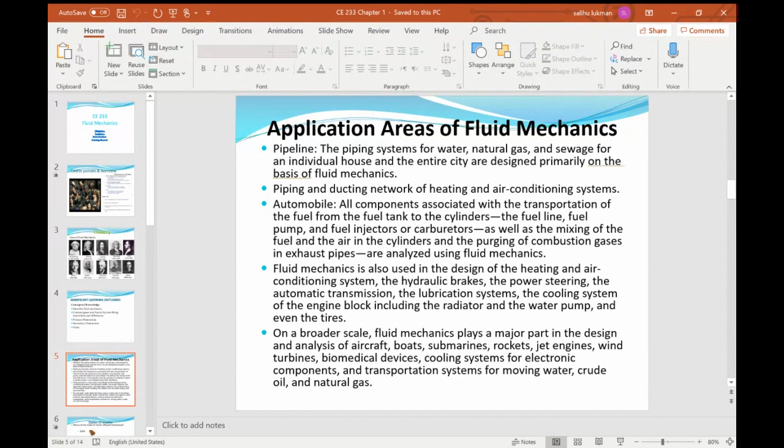Okay, yeah, you can. If you have issue, sign out and sign in. I think you're already back. So let me share my other screen.

Okay, so in chapter 1 here, we will be looking at the properties, the fluid properties. And the significant learning outcomes from this chapter will be, you will learn conceptual knowledge and procedural knowledge. Conceptual knowledge: the properties of fluid, density, specific gravity, viscosity. Most of these fluid properties, you discussed them in Physics 101, okay?

But here, we will introduce the engineering, because the title of the course will actually be Engineering Fluid Mechanics, because fluid mechanics is also studied in physics. But that is from the science perspective. Here we will study fluid mechanics from the engineering perspective.

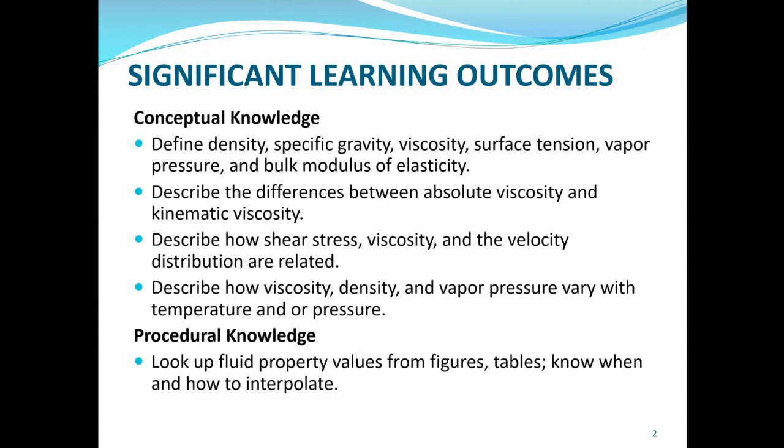And then for the procedural knowledge, we will look up fluid property values in figures and tables, and know when and how to interpolate. Now, before we move on, we would like to start by introducing the system concept: system, state, and property. What do we mean by system? A system is the specific entity that is being studied or analyzed by the engineer. A system can be a collection of matter or a region in space.

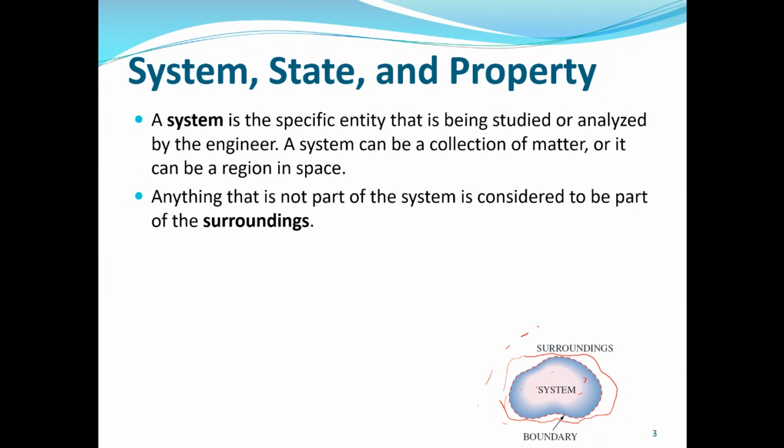We call it a system. It can be a collection of matter or just a region in space that an engineer is interested in analyzing. Like here, this is a system, you can see it here. Now, anything that is not part of the system is considered to be part of the surroundings. You can see the system isolated here. So anything that is not inside the system is called the surroundings.

And the boundary is the imaginary surface that separates the system from its surroundings. It has zero thickness. So this is the boundary, you can see it dotted around them. It's the separation between the surroundings and the system. It has zero thickness, it has zero matter, and it has zero volume as well. So it is just like a demarcation, a separation between the system and the surroundings. We call it boundary.

For each problem you solve, it is your job as the engineer to select and identify the system that you are analyzing. And later in chapter 5, we will expand the system properties to define what is called the open system and closed system: the open system, which is synonymous with control volume, and the closed system, which is synonymous with control mass. And there we'll look at boundaries, constant boundaries, movable boundaries.

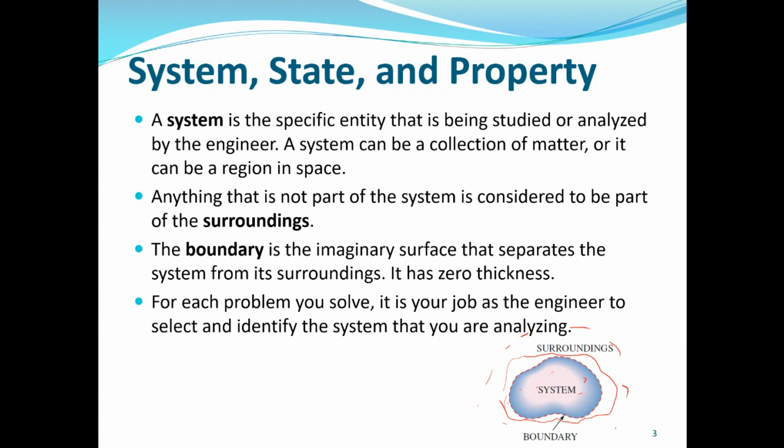Because in a control volume, energy and matter can both cross the boundary, while for a closed system, only energy can cross. Matter cannot cross the system boundary. But we will expatiate more on this in chapter 5.

So systems are described by specifying numbers that characterize the system. The numbers are called properties. Properties here is like when you take yourself, what are your properties? What are your characteristics? You are tall, you are 70 kilograms, your weight. Your height is, let's say, 1.5 meters, and you are light in complexion. So all these are your characteristics, which are also called your properties. So if you look at yourself as the system, those characteristics of yourself are your properties.

So a property in this case is a measurable characteristic of a system that depends only on the present conditions within the system. Like now, if you look at yourself as the system, when we measure your weight, you are 70 kilograms now. Who knows? Tomorrow you can increase if you eat more. If you eat less, your weight can reduce.

And the state of a system means the condition of the system as defined by specifying its properties. It's like when you have a gas in a cylinder, you specify its temperature and pressure. So these are the properties of the system, and the system here is the gas inside the cylinder. When a system changes from one state to another state, this is called a process.

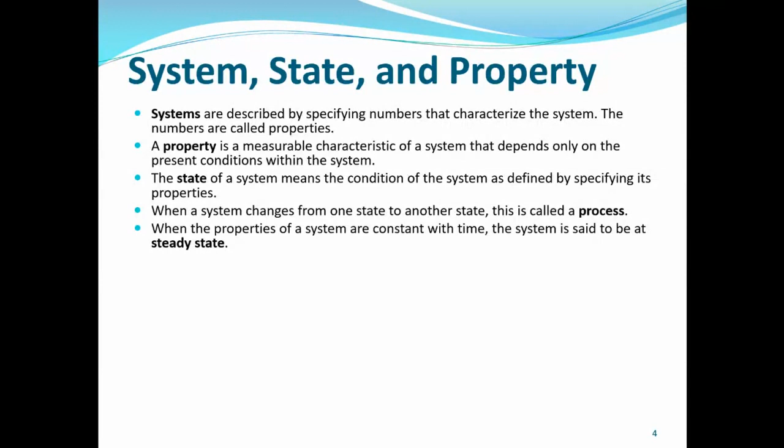When the properties of a system are constant with time, the system is said to be at steady state. When you are considering a given point, when the properties of the system are constant with time, you can say the system is at steady state. Steady means constant; it is not changing. If you are considering a volume of a gas in a cylinder, if the temperature and pressure remain the same at a given point in time, then it is at a steady state.

Whereas if it changes with time, if it is variable at a given point, then it is unsteady. This will expatiate more again when we come to explaining the different types of flow. This is referring to state, but we can also describe it using flow: steady state flow, uniform flow, and what have you.

Properties are often classified into categories. Two examples of the categories are given. Kinematic properties: these are properties of the system that characterize the motion of your system. That's why it's called kinematic. You have the kinetic energy. Whenever you have kinematic, it's referring to motion. Examples: position, velocity, acceleration. So all these are kinematic properties.

And you have material properties. These properties characterize the nature of the materials in your system, like what is their weight, what is their density, their specific gravity. So this is specific to the material. While the kinematic properties are specific because the material gets those properties by virtue of being in motion. You can only have velocity if you are in motion. You can only accelerate if you are in motion, isn't it?

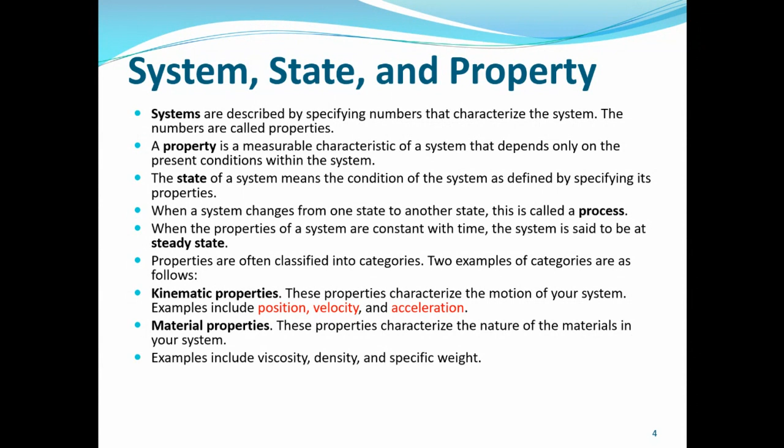Now, system state and properties. I started introducing the closed system, which we call control mass, with a moving boundary. You have a gas here whose mass is 2 kg and which occupies a volume of 1 meter cube. So if you consider the gas to be the system, the boundary between the gas and the container is the moving boundary, because this is the piston preventing the gas from escaping. And this is a fixed boundary.

When you apply heat here, the temperature changes, it expands, and it may push the piston up depending on whether it is movable or not. So if it expands, the volume now increases, it changes from 1 meter cube to 1.5 meter cube, but the mass remains the same.

You have the same mass of gas inside. Okay, the mass remains the same. So that's why it's called closed system or control mass. Okay, the mass doesn't change. But for control volume, usually you have inflow and outflow. Okay, inflow and outflow of mass, as well as energy. So here only energy can pass through, but mass doesn't pass through.

Okay. Now the property of the system, you can characterize the property of the system here, like you can provide the temperature, the volume, the pressure. Okay, so all these are properties of the system. Or in this case here we have mass, and as well as the volume, although the volume changes in the second one. Okay, is it clear? Gentlemen, is it clear?

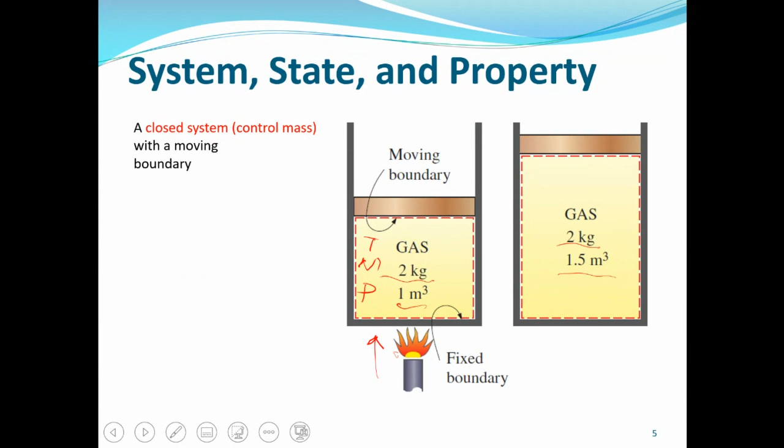Okay. Now, we will look at the general properties of fluid. We have started explaining about velocity as the rate of movement of fluid. It is considered very significant when studying kinematics and hydrodynamics of fluids. It has no significance when dealing with fluids in hydrostatic conditions. Hydrostatic conditions mean the fluid is at rest, so we don't consider velocity. We can say the velocity is zero. So it's a special case. And the SI unit of velocity is meter per second, while the imperial unit is feet per second.

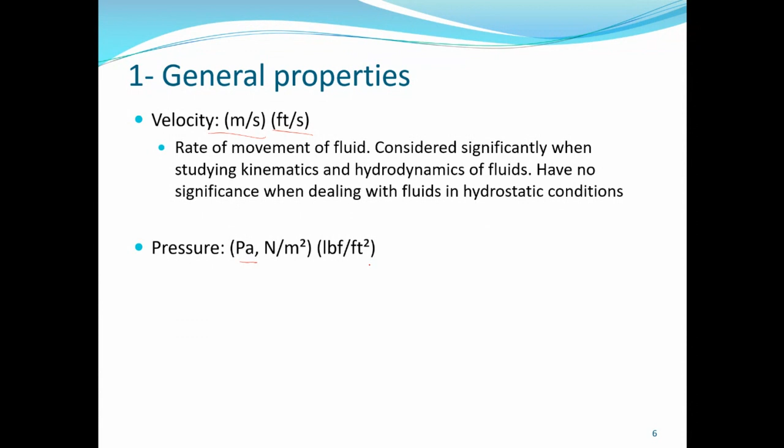And then pressure. The SI unit is Pascal, which is a special unit given to it using the name of the scientist who worked very well in that area, Blaise Pascal. And then the derived unit is Newton per meter square. Because pressure is usually very high, we usually use higher values, kilopascal, megapascal. Practically, the atmospheric pressure, as small as it is, is 101.3 kilopascal. So usually we use prefixes to show the multiple, like kilopascal, megapascal, and what have you. And then you have the imperial unit pound force per feet squared.

And pressure, we have started explaining pressure as it applies to fluid and solid, although we will also expatiate more on that. Because pressure, when you're talking about fluid, is different from when you're talking about solid. In solid, we usually call it the normal stress. In fluid, we call it pressure, for water and gas as well. For gas, we usually consider it to be constant. For liquid, it varies with depth. It varies with depth also in case of gas, depending on the elevation, the altitude, the variation in depth. If it is not significant, we assume it is constant, unless the depth is really huge.

So pressure is the compression or stress at a point in a static fluid. Next to velocity, the pressure P is the most dynamic variable in fluid mechanics. Differences or gradients in pressure often drive a fluid flow. When you have differences in pressure, that is when you have fluid flow. Fluid flows from areas of higher pressure to areas of lower pressure, from high pressure point to low pressure point.

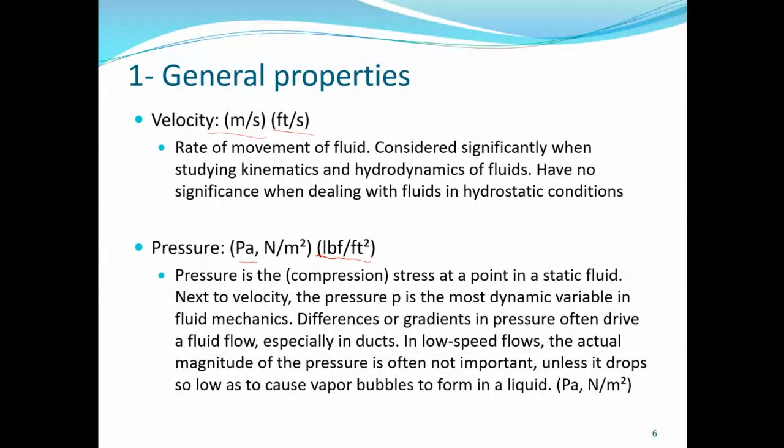And in low speed flows, the actual magnitude of the pressure is often not important unless it drops so low as to cause vapor bubbles to form in a liquid. When you have a drop in pressure below the saturated vapor pressure, when you have flow in a pipeline, you have what is called cavitation. So when it drops below the vapor pressure, you have bubbles forming in liquid, and those bubbles can be disastrous in pipe flow. This we'll explain under cavitation.

Now, in addition to pressure, you have temperature, which is a measure of the internal energy level of a system, of a fluid, the total internal energy of fluid. Although engineers often use Celsius or Fahrenheit scales for convenience, many applications require Kelvin or Rankine. The Kelvin is the SI unit of temperature without degree. Initially, we used degree Kelvin, but around the 60s it was removed. So for Kelvin, we don't use degree, but we use degree Celsius, degree Fahrenheit, degree Rankine.

And this is the formula to switch between them. Rankine is this for Fahrenheit, this is for Kelvin, and you also have another formula when you want to convert from Celsius to Fahrenheit. So more often than not, you have this to be the formula: degree Celsius is degree Fahrenheit minus 32, times 5/9. And you can make degree Fahrenheit the subject of the formula, and it is going to be degree Celsius times 9/5, plus 32.

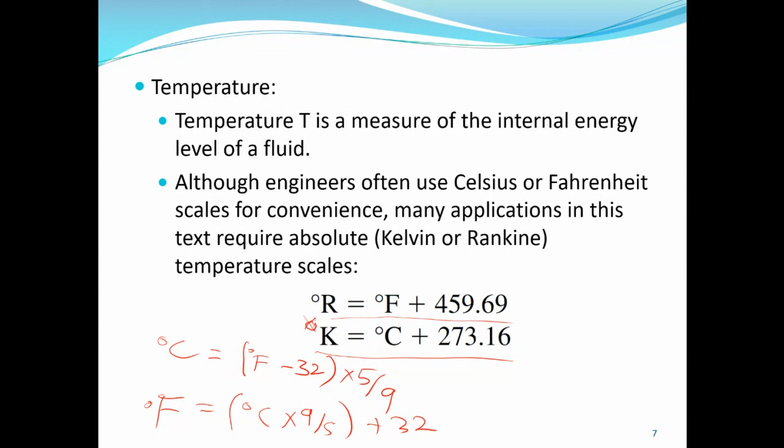Now, mass density. Like I said, you know what mass density is, definitely. So who can tell me? Just tell me, what is mass density? You can talk if you so wish. Yes, what is mass density? Tell me.

Yes, yes, I can hear you. What is density, gentlemen? Oh, let me check. Can you still hear me?

Yeah, what is density? It is mass over volume, right? Yeah, mass over volume. Mass of system over volume. Good. All right. So let me go back because it was in presentation mode, so I cannot see what you wrote. I have to exit the presentation mode and come back to the application.

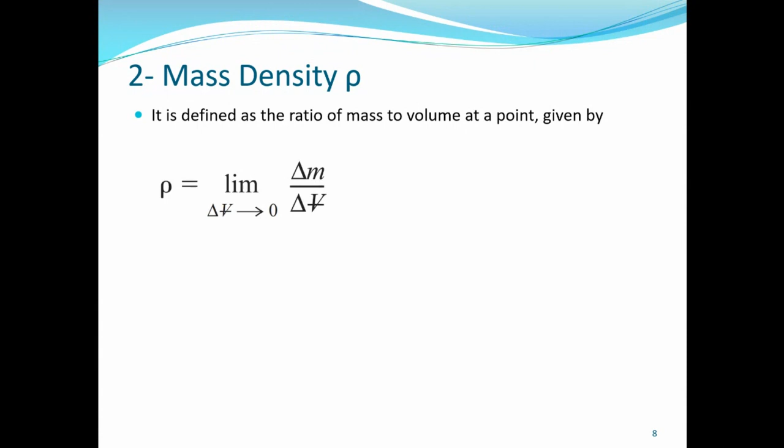All right. So mass density, which is rho, is defined as the ratio of mass to volume at a point, and it is given by the limit notation. Density is when you consider a very small amount of mass, delta M, over a very small amount of volume, in the limit when delta V tends to 0. That is the instantaneous, or simply mass over volume.

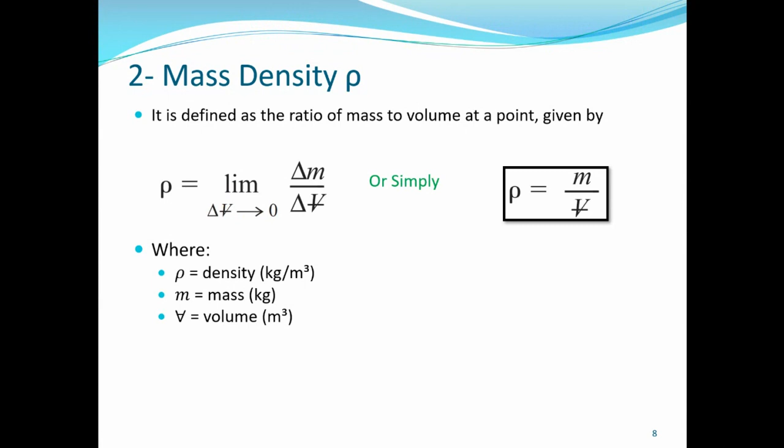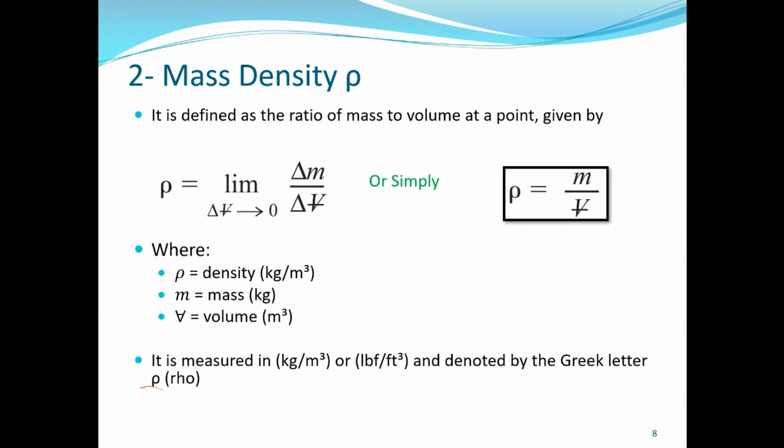So this is like a special case in which you have the average, when you have the whole body, the average mass over the average volume, where density is in kilogram per meter cube, mass is in kilogram, the SI unit, and volume is in meter cube. It can also be measured in imperial units, and we use rho to represent mass density.

The density of water at 4 degrees Celsius, where water has its highest density, is 1,000 kilogram per meter cube, and it decreases slightly with the increase of temperature. This is table A5, which shows the variation of the density of water. As you can see, when the temperature increases, the density decreases.

So why does the density decrease with temperature? Why does it decrease with temperature? Who can explain to me? Who can explain to me? Yes, I can hear you, please.

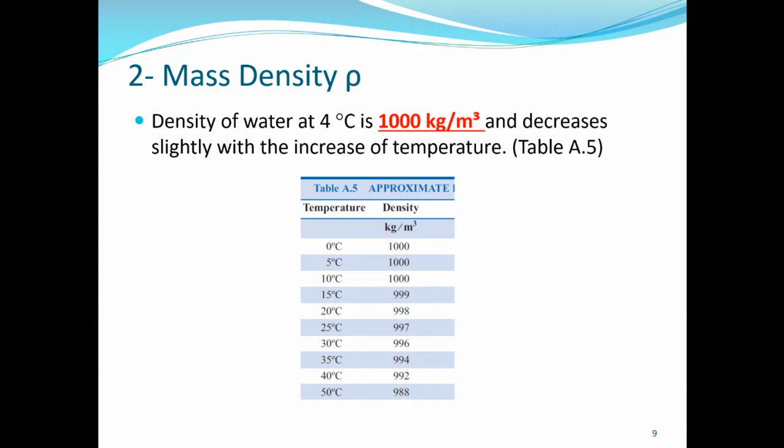You can see at 50 degrees it is 988, at 4 degrees 1000, at 0 degrees also about 1000. But usually when it turns to solid, that is to ice, the density is lower than that of water, and that is why you have ice floating in water. Okay, we'll come back to this.

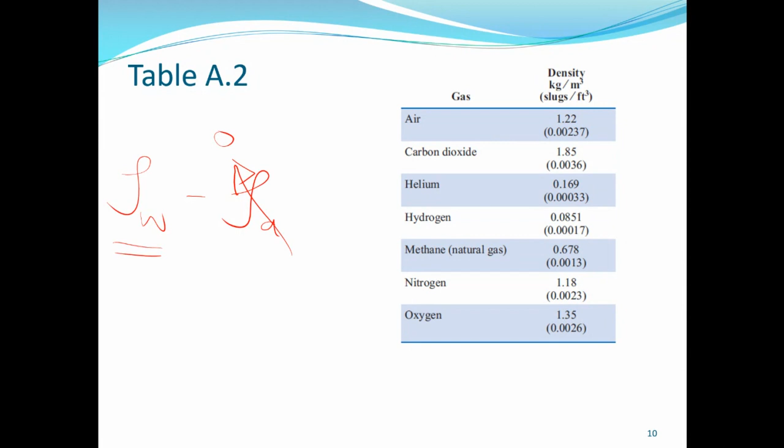And that is why in computation, when we have, let's say, density of water minus density of air, we normally ignore the density of air or set it to 0 because it is very small compared to the density of water. You can imagine here 1000 minus 1.22. Very negligible change, 998 point something. So it is usually very, very small.

So for practical purposes in computation, as we are going to see in chapter 3, when we have gases in our system and we want to find the pressure using hydrostatics, we normally ignore the density of the gas because it is so small, if we are taking a difference between density of liquid and density of gas. Air is 1.22, very small.

Carbon dioxide, 1.85. Helium, 0.169. Hydrogen, 0.08, very, very light. Methane, natural gas, 0.6. Nitrogen, 1.18. Oxygen, 1.35. Some of these gases are available in the atmosphere, isn't it? Who can tell me what gases are available in the atmosphere?

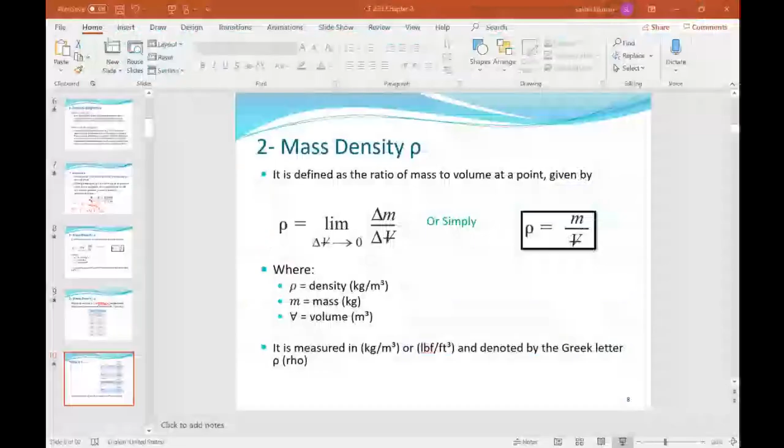I need to be switching to see what you are saying. Oh, someone is saying, what is the question? Because the molecules are small. So, well, tell me the gases available in the atmosphere quickly. You can just tell me or you can type it. I am back to the Blackboard area.

Okay. The gases, all the gases available in the atmosphere. We define the atmosphere as the air surrounding us, the available space around us. Okay, what are the gases in the atmosphere? Yes, you have. Just tell me. Like I said, I enabled your mic. Gentlemen. Ya Shabab.

Okay. Someone is saying hydrogen. But okay. What else? Oxygen, nitrogen. What else? Carbon. Repeat the question. The question is, tell me the gases available in the atmosphere. What are they? Hydrogen, oxygen, and carbon. And what? Carbon? Carbon is not a gas. Carbon is not a gas. Helium, okay, carbon dioxide, okay, now you are talking.

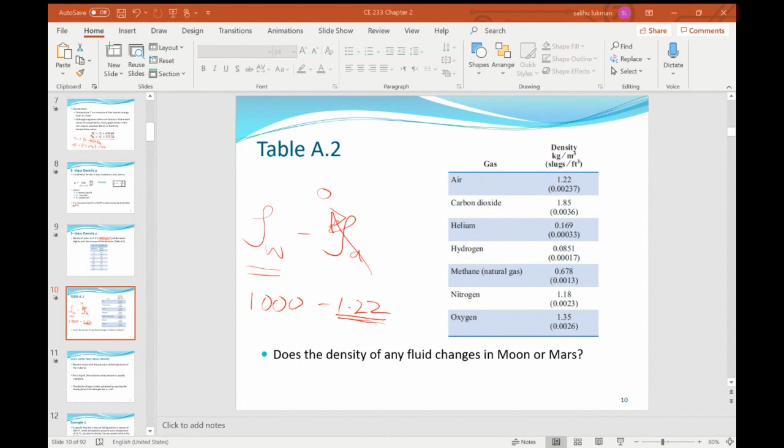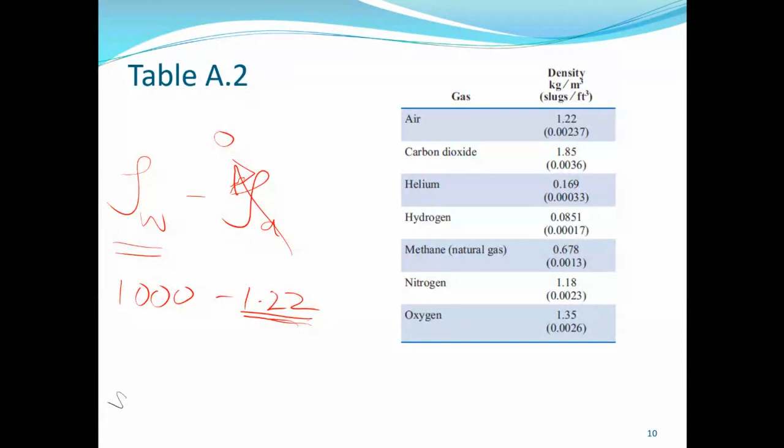Does the density of any fluid change in Moon or Mars? Now, answer this question. Does the density of any fluid change in Moon or Mars? Hmm? Does the density change in Moon or Mars? It is not sharing my screen again. It does not change. Why? Okay. Does the density of any fluid change in Moon or Mars?

It doesn't change because density is mass over volume. And does mass change in Moon or Mars? No, mass doesn't change. Weight changes? Yes, weight changes from planet to planet because of the variation in acceleration due to gravity. But the density of any fluid doesn't change irrespective of where it is.

Some useful facts about density. Density varies with the pressure and temperature of the material. We have seen for water how it varies. For liquid, the variation with pressure is usually negligible, because density is mass over volume.

Liquid has tiny spaces between the molecules, but before you can compress it, before you can reduce the volume of liquid, the pressure has to be so huge. That's why we consider liquids to be incompressible, because you need to apply about 210 atmospheres to compress water by 1%. Just 1%. You need 210 atmospheres.

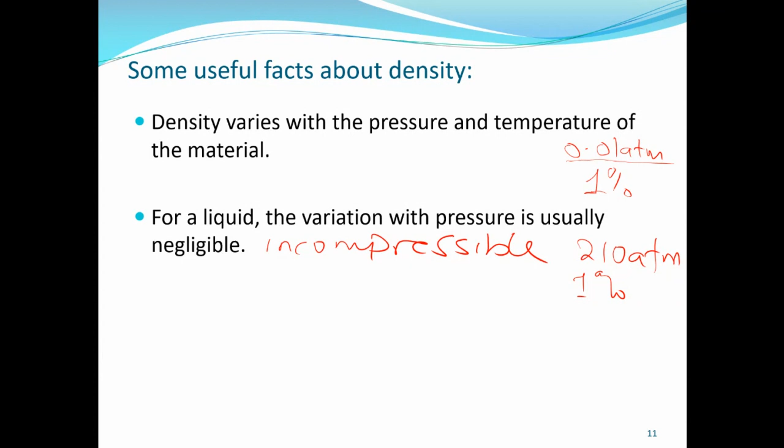The density of a gas is often calculated by applying the density form of the ideal gas law. Although fluid, like I said, also refers to gases, I will not be delving so much into the ideal gas equation or the gas properties, the gas treatment.

Our focus will remain on water as our main fluid. But like I explained, mechanical, civil and chemical engineers deal with a lot of systems that have both liquid and gas, or even just gas alone. So they need to go all the way to deal with the ideal gas equation, the properties of gases, and what have you. But for civil engineering applications, more often than not, our main interest is water as our main fluid.

Now, we said density varies with pressure and temperature. Why does it vary with pressure and temperature? Density is mass over volume. This we explained. So what happens when you increase the temperature? When you increase the temperature, the molecules become more mobile, isn't it?

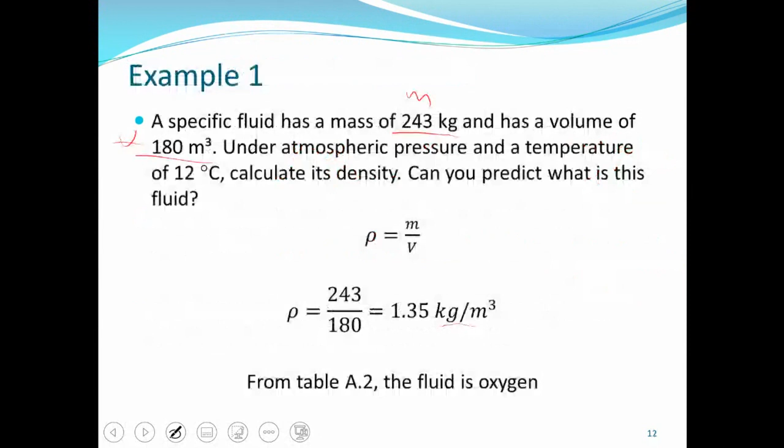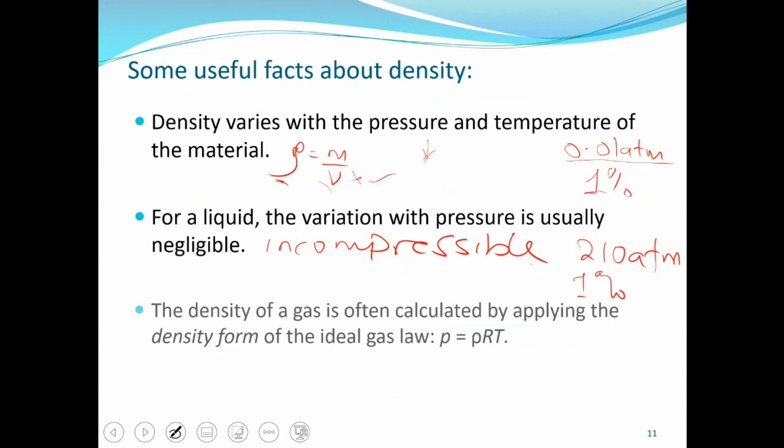We can go back to table A.2. If the density is 1.35, that is oxygen. Oxygen is the one having a density of 1.35. So, a very simple application: the fluid is oxygen. Now we'll move on to another property, which is specific weight.

Specific weight is the gravitational force per unit volume of fluid, or simply weight per unit volume. Weight is the gravitational force acting on a body, the effect of the force of gravity on that body. So weight per unit volume is the specific weight.

In fact, when you hear the term specific, it means it is per something. Either you're considering mass, 1 kilogram, as in specific heat capacity, or in this case specific weight, specific volume, and what have you. It means divided by something. Here we have per unit volume, and we use the Greek symbol gamma for specific weight. So gamma is just weight over volume.

Weight is what? Weight is mass times gravity, over volume. And then what is mass over volume? We just finished explaining it: mass per unit volume. Tell me, what is mass per unit volume? Density. So this is now rho g, isn't it? So specific weight is either weight per volume or equal to rho g.

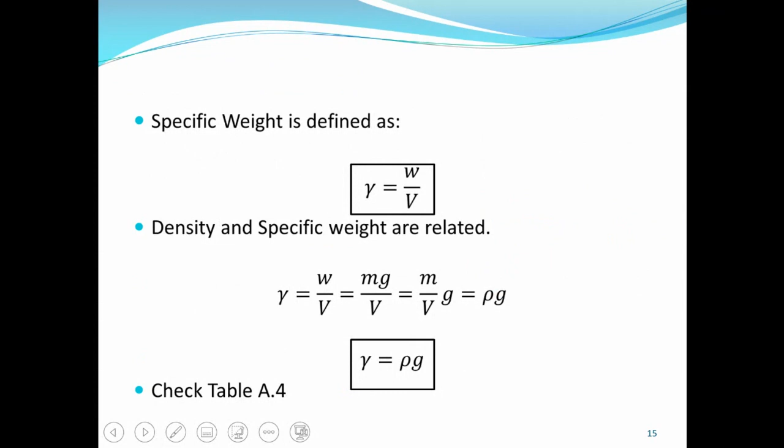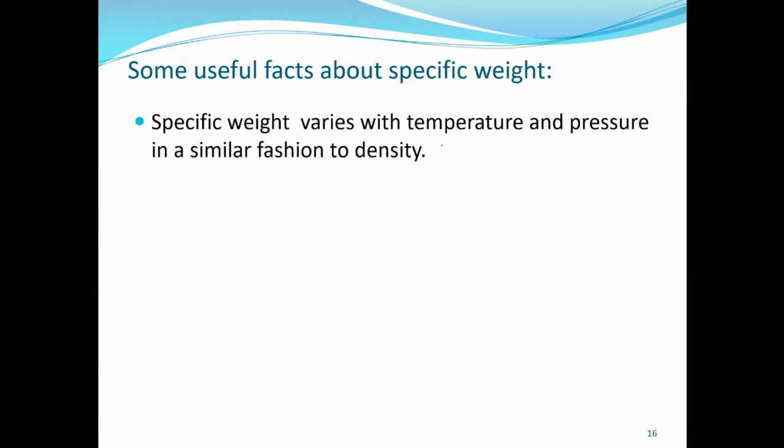Now specific weight, weight over volume, some useful facts about specific weight. Specific weight varies with temperature and pressure in similar fashion to density. Since specific weight depends on density, whatever will affect density will affect specific weight. So we'll expect the specific weight to decrease when the temperature increases, and we'll expect it to increase when the pressure increases.

Specific weight is commonly used for liquids, but not commonly used for gases. So why is that? Because the gases, they don't feel the gravity. The gravity doesn't make anything to gases. What? I mean, the gravity doesn't change the gases, so the weight is not commonly used for the gases. What doesn't change for gases? I mean the mass, because there is no acceleration of gravity on the gas. Oh, okay. Can someone expatiate more on that?

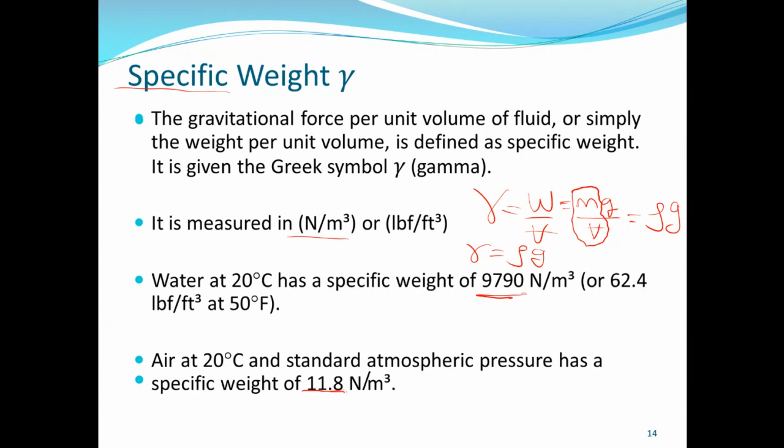You know, specific weight, because we say density. Density of gases is usually very small. You can see here, this is just 11.8, this is 9,790. So it is usually very, very small. The specific weight is not significant for most gases. That's why it's usually considered for liquids.

Definitely the one with higher gravitational acceleration is heavier, from Newton's law of gravity: F equals G m1 m2 over r squared. Let's say m1 is the mass of the planet. So if it is heavier, it will have more gravity; the force of gravity will be higher on the objects around it. Meaning Earth is heavier than Mars, heavier than Moon. But what about Jupiter? The acceleration due to gravity will be far greater than 9.8, because it is heavier than Earth.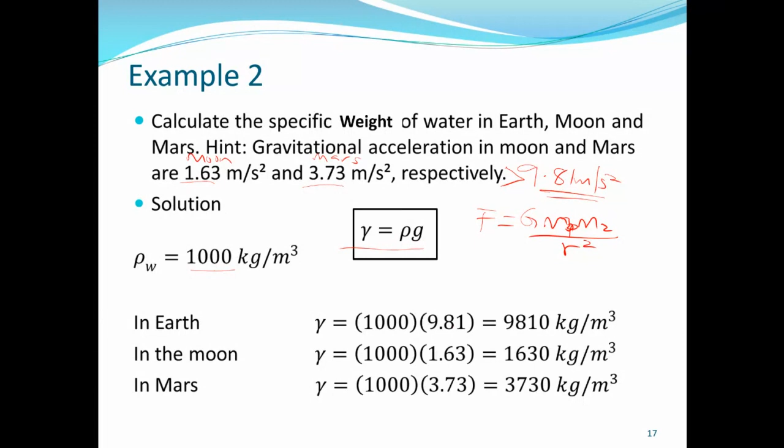All right. So here we want to find the specific weight of water on Earth, Moon, and Mars, and we just use this formula. We know the density of water, which is constant. It remains the same on the Moon, on Mars. But g will change: 9.81, 1.63, and 3.73. So the specific weight will vary, because it's also a function of acceleration due to gravity.

Now, specific gravity or relative density. Like I said, when you have specific, it means it is per something, so you have a ratio. The ratio of specific weight of a fluid to the specific weight of water is called specific gravity. We use S or sometimes SG to represent the specific gravity. Relative density is synonymous; for relative density, we use RD.

Relative density is just the ratio of the density of fluid over density of water. So we are comparing the density to water; our reference in this case is water. Or it's the same thing as the specific weight of any fluid over specific weight of water. So who can tell me what will be the specific gravity for water? Just talk, because I need to exit the presentation to see what you write. What is the specific gravity of water?

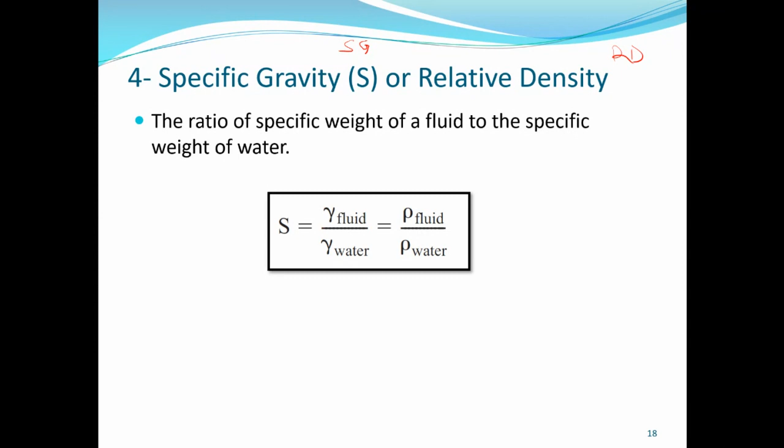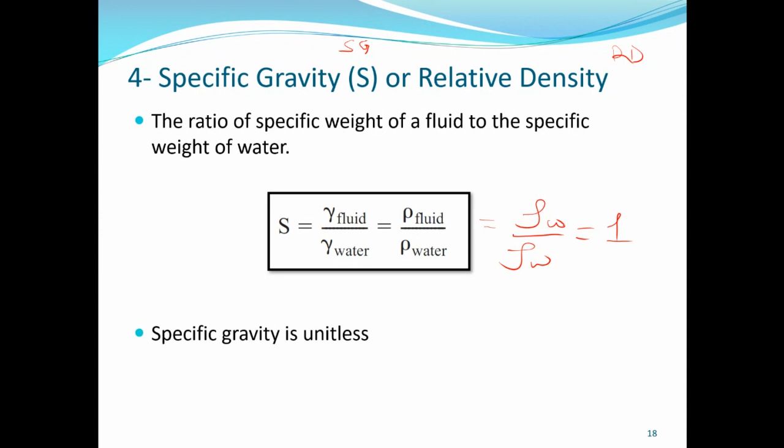Yeah, definitely it's going to be 1, because it's density of water over density of water, so they will cancel out, 1000 over 1000. So the specific gravity of water is going to be 1. Specific gravity is unitless because it's a ratio of the same quantity: kilogram per meter cubed over kilogram per meter cubed. So they will cancel out. It is dimensionless, it is unitless.

Some useful facts about specific gravity. It is equal to 1 if it is water, but what if it is less than 1? It means the fluid density is less than the density of water, so it will float, like oil or gasoline, like benzene. Benzene is less dense than water, but crude oil is heavier than water. So the specific gravity of crude oil is going to be more than 1, so it's going to sink, isn't it?

Wood and styrofoam float on water. Just like we explained the density of air: density of air is 1.2, but density of hydrogen is less than the density of air. That's why when you fill a balloon with hydrogen or helium gas, it will float. That's why you have hydrogen balloons. When something's density is less than the density of water, it will float in water. The same thing with air.

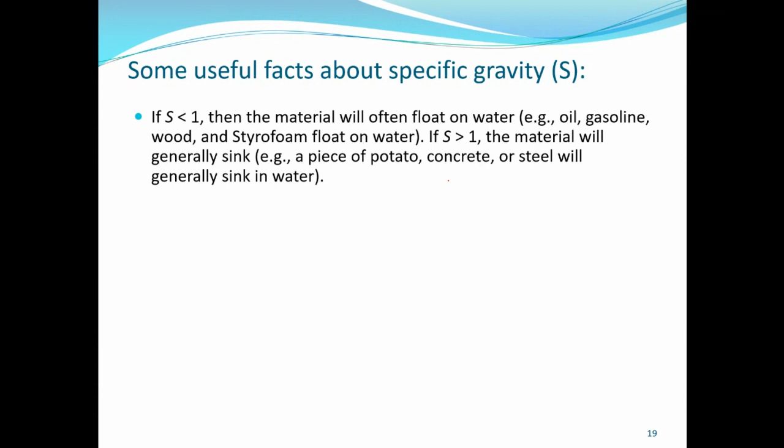When you go to the malls, you have small balloons for the kids filled with helium. When you release the balloon, it rises up, meaning it floats in air, because the density of the gas inside the balloon is less than the density of air. The same thing here: specific gravity is the density of fluid over density of water. If it is less than 1, the density is less than that of water, and it will float.

If it is greater than 1, it means the density of the material is greater than the density of water, and it will sink, like potato or concrete. Most solids have density greater than the density of water. But I told you ice has density less than the density of water, and that's why it floats.

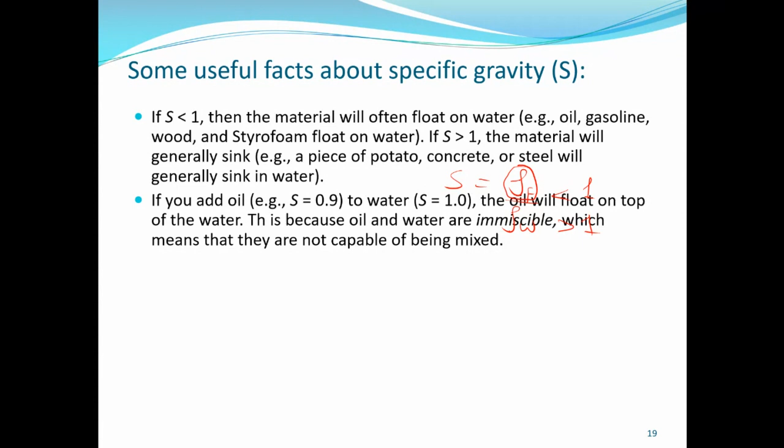If you add oil, whose specific gravity is 0.9, to water, specific gravity 1, the oil will float on top of the water, isn't it? This is because oil and water are immiscible, meaning they cannot mix, they are not capable of being mixed.

If you add alcohol, with specific gravity 0.8, to water, the alcohol and water will mix, so it will not float like oil. Fluids that are capable of mixing are called miscible. The properties of density, specific gravity, and specific weight are related. If you know one of these properties, you can easily calculate the other.

If you know density, you can easily calculate specific weight because it is rho g. If you know specific weight, you can easily calculate specific gravity; you can use either specific weight or density. Whichever one will give you the same thing.

Values of density and gamma for water at 4 degrees are listed in Table F.6, and the values of specific gravity for liquids are listed in table A4 in the appendix.

Specific gravity is commonly used for solids and liquids, but it's rarely used for gases, because the density of gases is usually very low. So imagine having the density of air, let's say 1.2, over 1,000.

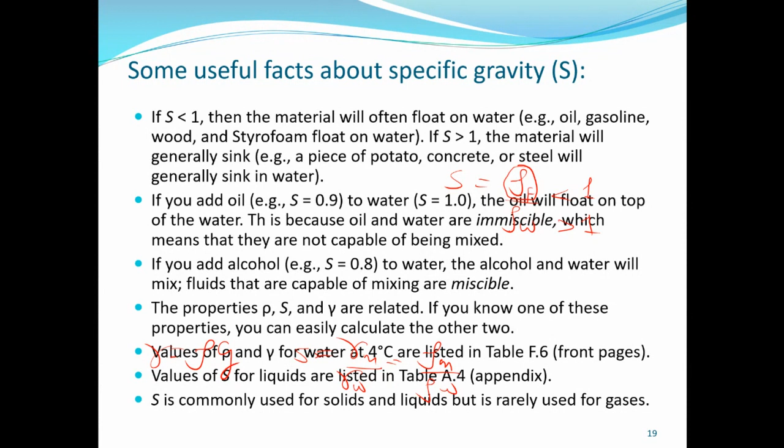So the value of the specific gravity will be extremely small, very, very small. So it is commonly used for solids and liquids, but rarely used for gases. So recommended working knowledge here: the specific gravity of petroleum products, e.g., gasoline or oil, is less than 1, 0.7 to 0.9. But I told you crude oil has specific gravity greater than 1.

And again, seawater, that's the water in the ocean, because it has a lot of dissolved minerals, dissolved salts, its specific gravity is 1.03. It is heavier than fresh water. Fresh water, the specific gravity is just 1. But seawater, because of the high mineral content, high dissolved salt that it has, its specific gravity is higher. And mercury specific gravity is 13.6.

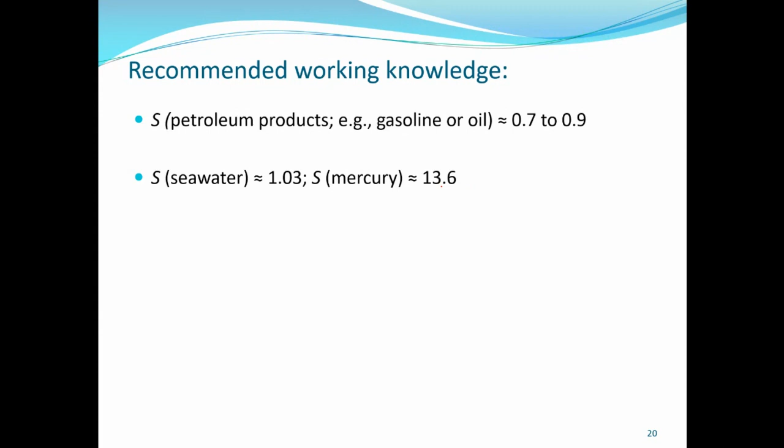You can see very high, higher than that of water. Water's specific gravity is 1, but mercury, you know, it is very thick, semi-solid, or metalloid. So for seawater, if I ask you to explain why the specific gravity of seawater is higher than that of fresh water, simply because of the mineral content that you have in seawater. It has a lot of dissolved salts.

And specific gravity is what? It's a function of mass. So if it is pure H2O and you have additional mass added in the system, then definitely the specific gravity will increase, isn't it? That of steel is 7.8, that of aluminum is 2.6, concrete 2.2 to 2.3.

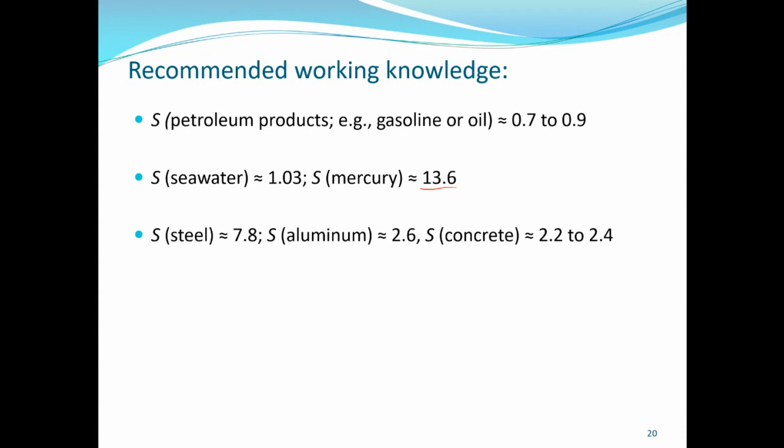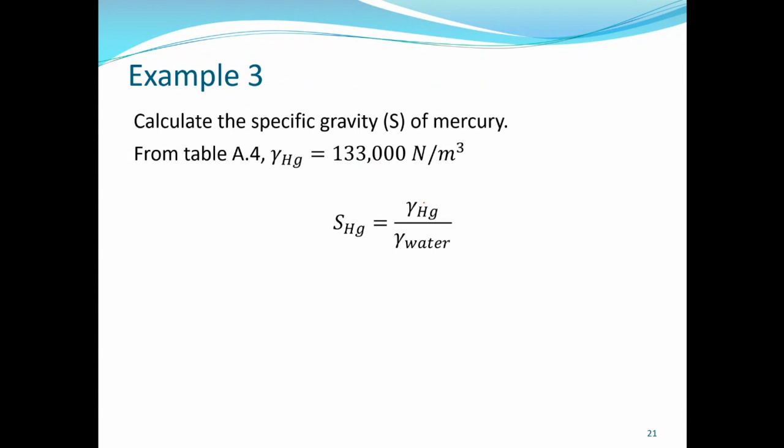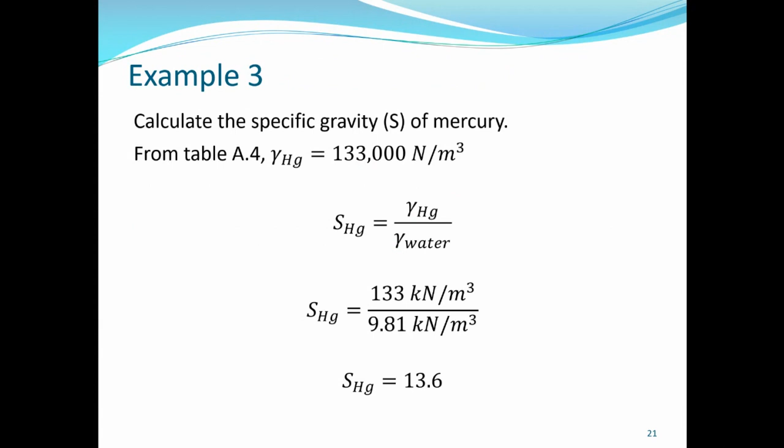Now calculate the specific gravity S of mercury. The specific weight of mercury is 133,000 newton per meter cube. So the specific gravity of mercury is the specific weight of mercury over the specific weight of water, in kilonewton, which is 13.6. And you can do the same thing to find the specific gravity of any other material, as long as you know the specific weight or the density.

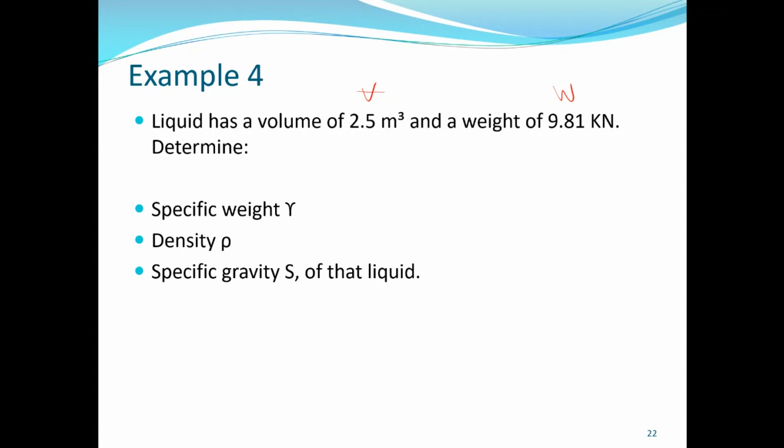Here it says a liquid has a volume of 2.5 meter cube and a weight of 9.81. So this is the volume and the weight. Determine the specific weight, density, and specific gravity of the liquid. So this is very, very simple. The specific weight is weight divided by volume. The density is mass over volume. We don't know the mass, but we can find the mass.

Because if we have the specific weight, how can we now find the mass, or the density? Because this is weight over volume, or rho g. So all this is known, so we can find the density, correct? And then for specific gravity, we can either use the density of the material, which we found here, over the density of water, which is known. So very simple and straightforward.

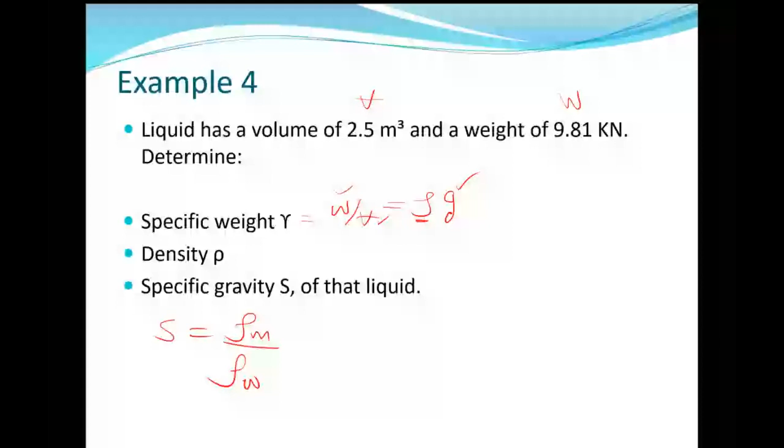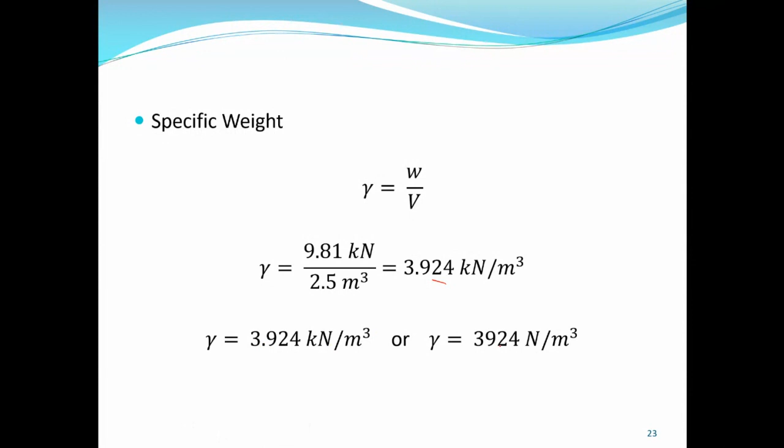So we found the specific weight here. This is in kilonewton per meter cube. And then the density is mass over volume. So we found the mass first. This is another way. You know, the method I showed before is also valid. You'll arrive at the same answer.

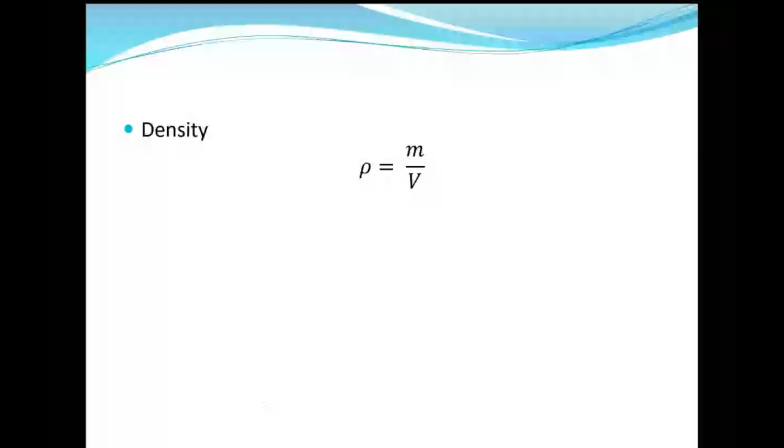Here we found the mass using weight equals mg. So the mass is 1,000 kilogram, and then the density is 400 kilogram per meter cube, and the specific gravity is just the ratio of the specific weights, which is 0.4. So definitely this material is going to float. Let me see, what is the material? Is it mentioned? Okay, it's a liquid.

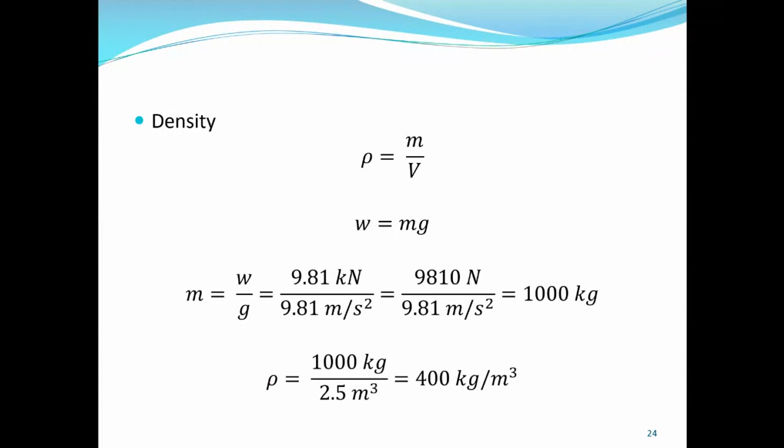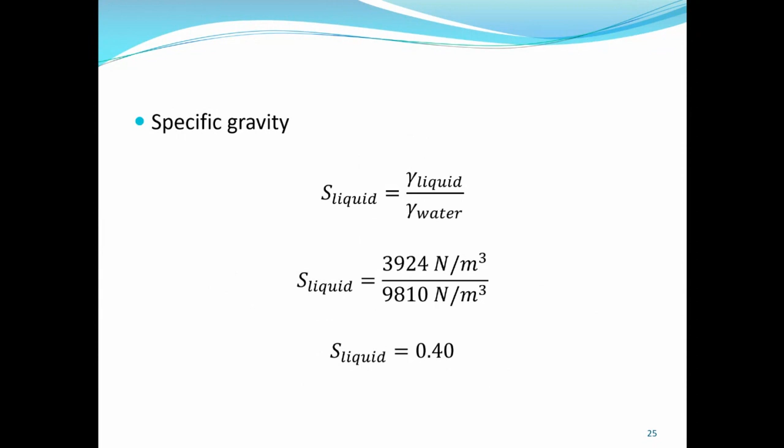If I ask you, is the material going to float in water or not? The specific gravity is 0.4, less than 1. So it is going to float if it is not miscible with water. Like oil. If it is like oil, then it is going to float.

Okay, let me see what you are saying, because someone is typing.

If they are equal to each other, what happens? If they are equal to each other, then it will be 1. You usually have variation unless it is the same substance. If it is the same material, then that's when it will be equal. Otherwise, definitely there will be some slight variation, more often than not.

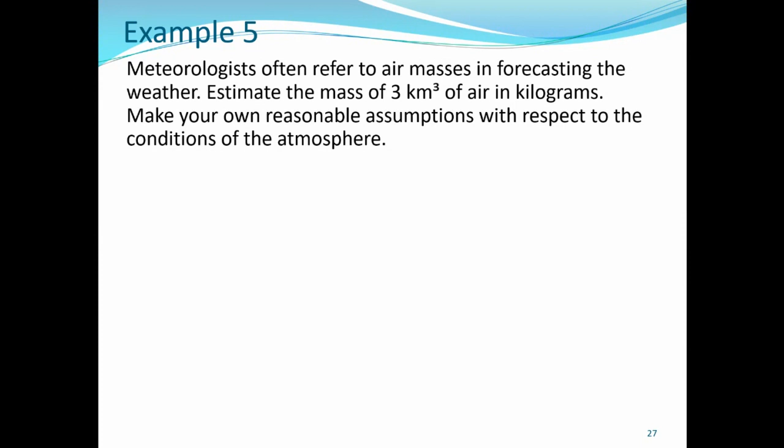Now I know the temperature is about 40 something degrees, so you can choose a higher temperature. But we specify it: density of air at 10 degrees. If you choose 40, you specify the temperature because it varies. This is the density, and this is just converting the volume from kilometers cubed to meters cubed. It's very simple to convert to meters cubed.

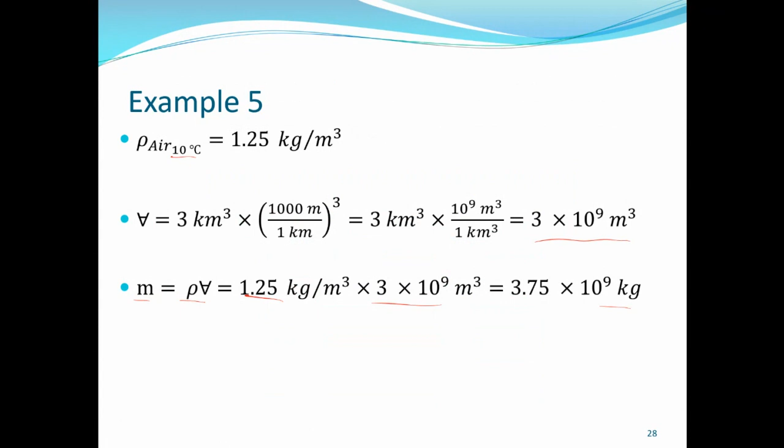Then the density is mass over volume, so mass is going to be density times volume. This is the density we got from the table, and this is the volume provided from the problem. So the mass is 3.75 times 10 to the power of 9 kilograms. So we move to the next lecture.

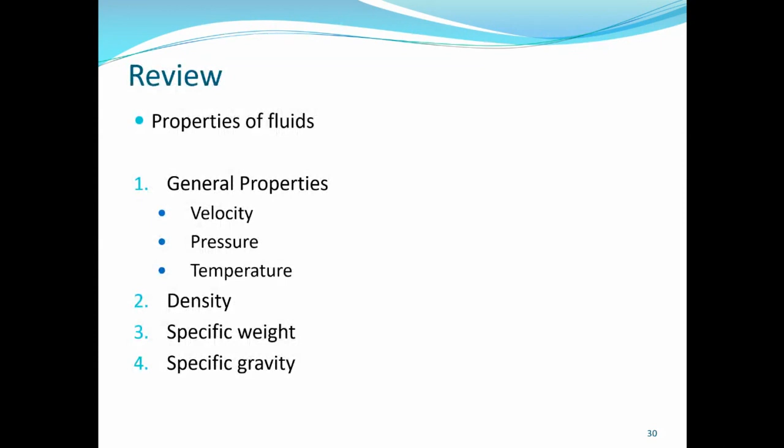Now, properties of fluids. These general properties: velocity, pressure, temperature, density, specific weight. This is what we considered. Now we move on to pressure and shear stress. I started explaining these concepts in the first class. When you understand stress, many topics in mechanics become easier.

So here is the big picture. The big picture is that there are only two kinds of stress: normal stress and shear stress. In fluid mechanics, the normal stress is nearly always just the fluid pressure. That's why we call the normal stress pressure in fluid mechanics.

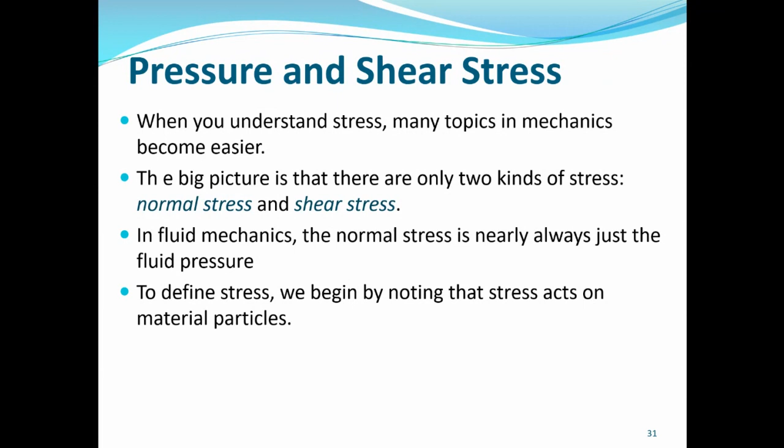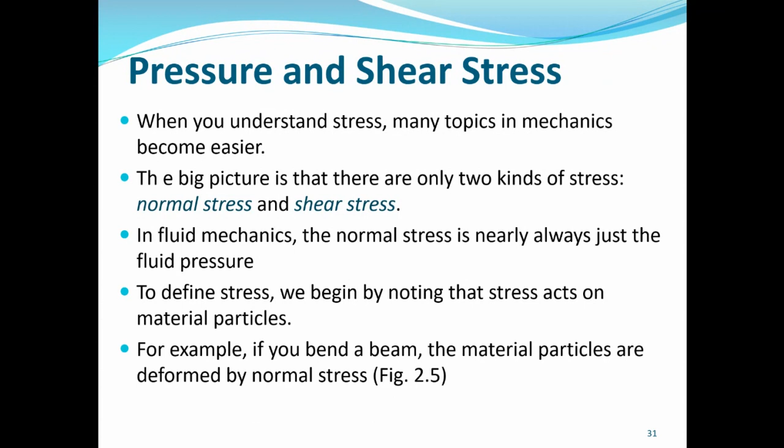And then to define stress, we begin by noting that stress acts on material particles, because it is more or less like the compression on the body, the force due to the compression on a given area. Simple. For example, if you bend a beam, the material particles are deformed by normal stress.

And that is why later you are going to learn why we need reinforcement. When you have concrete, it is very strong in tension, but it fails in compression. And that's why, like here, we need to provide reinforcement. We need to put reinforcement bars that will resist the compressive strength.

Sorry, it is the other way. It is very strong in compression and fails in tension. So concrete is strong in compression, but under tension it fails. So we need to get our reinforcement bars.

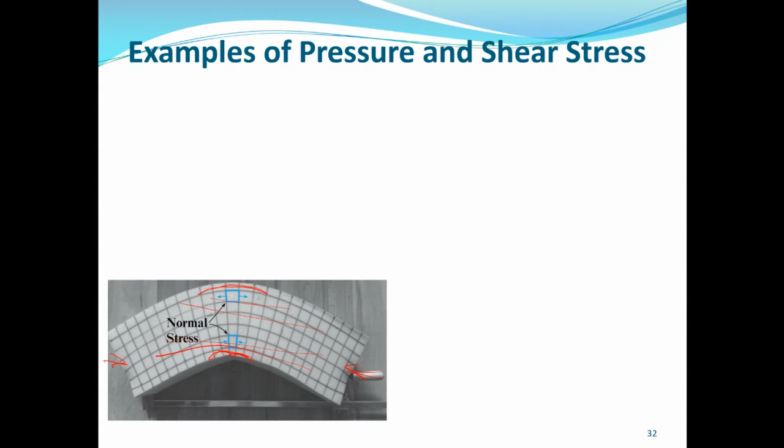This will be expatiated more in subsequent courses, probably in structural mechanics. You may begin to do it, most importantly in structural analysis and reinforced concrete design. So normal stress compresses the materials here. It elongates the materials at the top.

Now, this weight causes... Now, when we isolate the material, when we look at a grain, a particle, you apply a normal stress here. You have tangential stress, which is the shear stress. Sorry, tangential force, and this normal force. Delta Ft is the magnitude of the tangential component of the force vector acting on this face of the material particle. The tangential component, and this is the normal component of the force vector acting, and this is the cross-sectional area of the face.

Now, what is the pressure? Pressure is simply the normal force over the area. The normal force over the area constitutes pressure. We use the normal force over the area. Now, for stress, we use the tangential force, which is delta Ft, over the area.

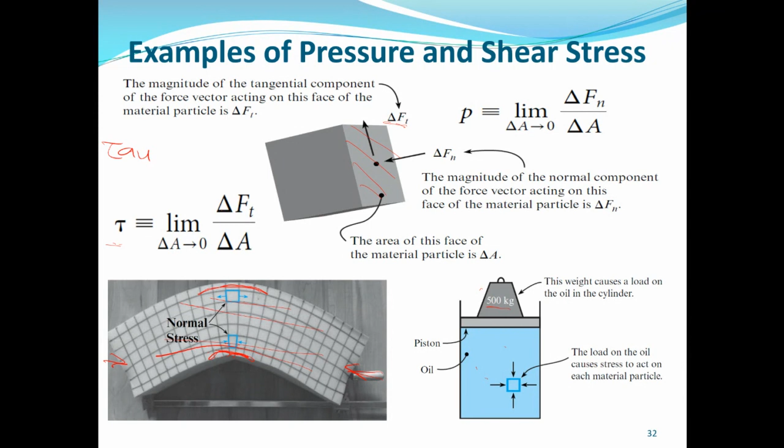And like in this case, this weight, say 500 kilograms, is added, and there is oil here. The load on the oil causes stress to act on each material particle because this weight is being held by this oil, so it is feeling the weight. It's like you holding one bag of cement. When you hold one bag of cement, you carry all the weight, so your muscles, the particles that make up your body, will feel the weight. So that is the pressure acting: the weight over the surface area in contact.

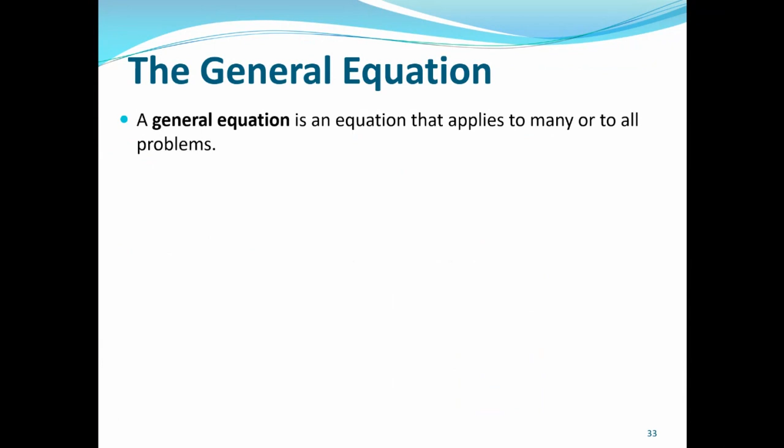Now, general equation. A general equation is an equation that applies to many or to all problems, but then you usually have a special case equation, which is derived from a general equation but is more limited because there are assumptions that must be made in order to apply it. As the name implies, special case equations are applied to special cases. So you need to understand all this.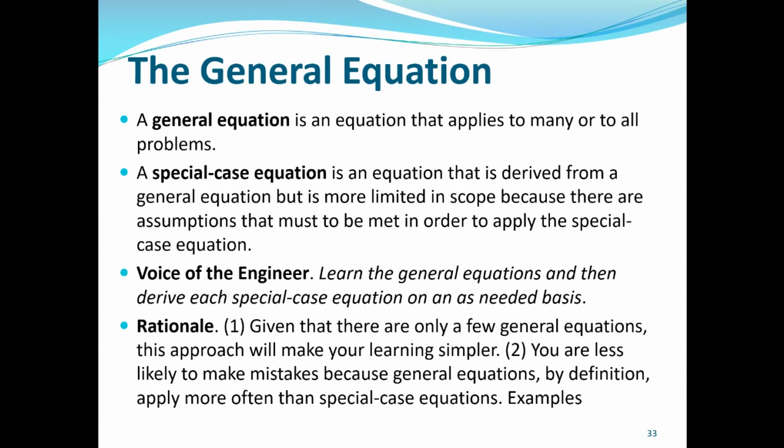Voice of the engineer: learn the general equations and then derive each special case equation on an as-needed basis. The rationale is that there are very few general equations, and it will make your learning simpler and you are less likely to make mistakes because general equations by definition apply more often than special case equations. And we have some examples of general equations.

Newton's law of universal gravitation is a general equation, and weight W = mg is a special case equation derived from it. Because it is simply F = G times mass of the Earth times any mass over R squared. So G times mass of Earth over R squared is now equal to the acceleration due to gravity, so F is now mg. F is now called the weight, and g is the gravitational constant times mass of Earth over R squared. And that is why the acceleration due to gravity varies.

On the surface of the Earth, at sea level, it is usually around 9.807 meters per second squared. When you go below sea level, it decreases up to a distance of about 4.5 kilometers below sea level, to about 9.8 or 9.7 something, and then it increases.

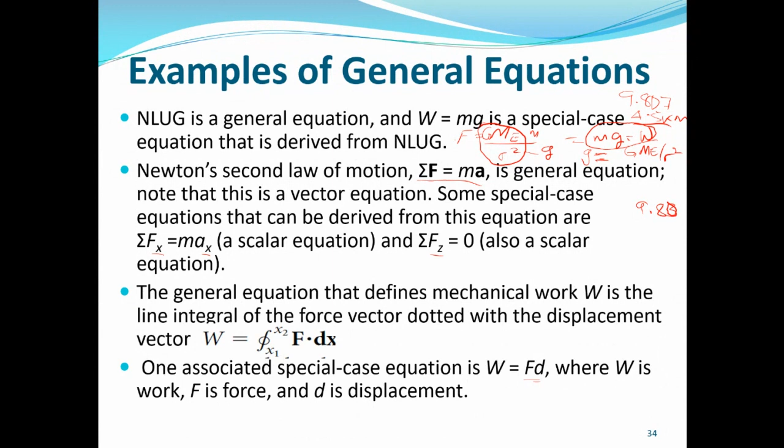This, summation F equal mA, and that's why F and A are in bold. They are written in bold because they are vectors. So you can look at a particular direction X, Y, to get the scalar equations, which are special case equations. Another example is mechanical work, which is defined as the line integral of the force vector dotted with the displacement vector, and the associated special case equation is force times distance, where W is the work, F is the force, and D is the displacement.

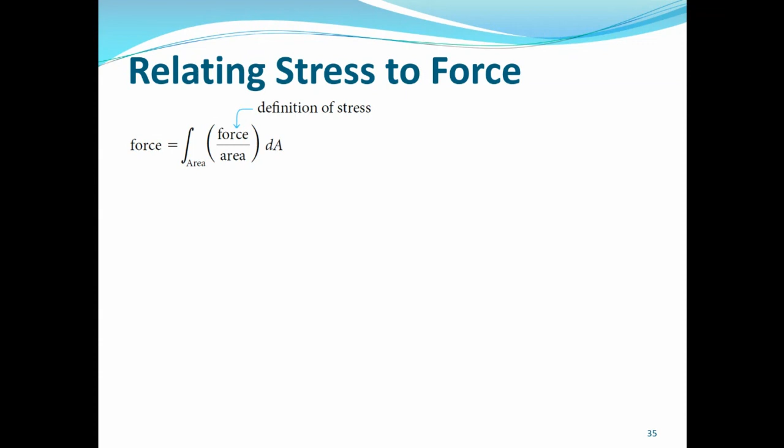Now, coming back to stress, relating stress to force. We have seen the shear stress is given by the tangential force over the area. So when you look at a body here where you have a flow, this is the pressure distribution acting on all sides, how pressure varies from point to point along a surface. In this example, pressure is large in front and low at the back.

So the force is going to be the integral over the area: the small force acting on the small area, when you sum it up, because integration is summation, force over area times the incremental area dA. When you sum it over the area, you have the total force acting, and force over area is the definition of stress. If you isolate a single point, you have dF acting on this area. dF is a force on a small area dA, and n is a unit vector that is outward from the surface. A unit vector gives the direction.

So here the unit vector is telling you that it is opposite to the force. The force is perpendicular to the surface area, and the unit vector n is outward from the surface, moving away. So the direction of the force is opposite to that of the unit vector, so it will be minus. So dF is going to be minus p n dA. Pressure, by the way, is not a vector quantity, it is a scalar quantity.

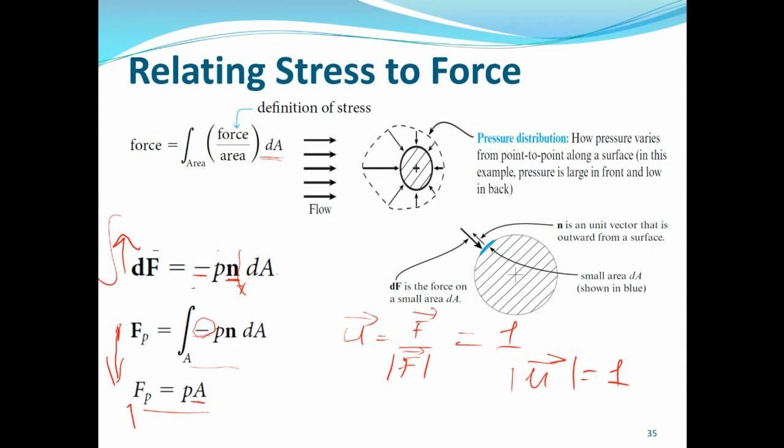And that's why here we remove the negative sign. So the assumption here, moving from here to here, is that this area is flat. It is flat, horizontal, and then the force vector is acting inward, that is into the area. It is perpendicular and into the area, not inclined, because if it's inclined, then you need to resolve it. So these are the assumptions I already explained.

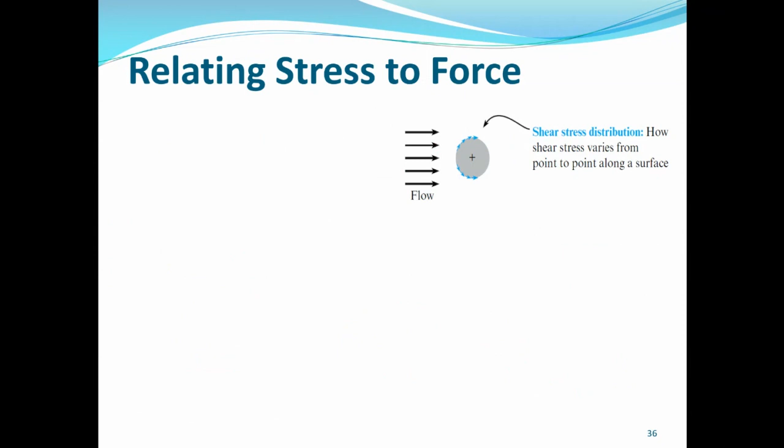So still on relating stress to force, when you have an object and you have a fluid flowing around it, there will be shear stress distribution, how shear stress varies from point to point. Remember in the first case we defined pressure. Now we want to define the shear stress, which is related to the tangential force, not the perpendicular force. The perpendicular force is the normal force. Now for the tangential force acting on the area, we use the shear stress.

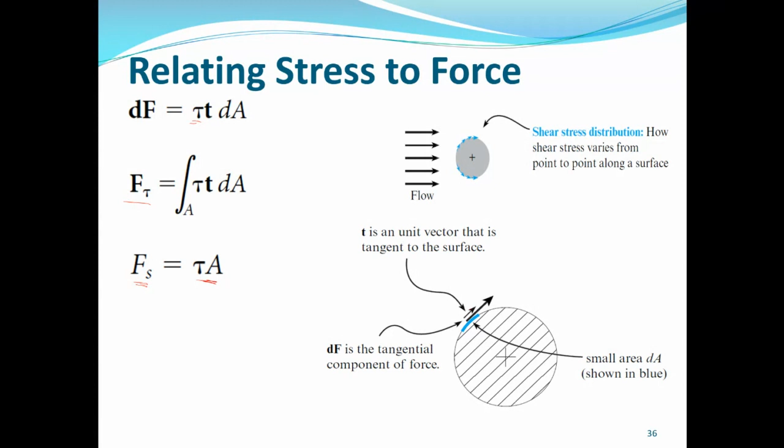So the force acting, t is the unit vector that is tangent to the surface and in the same direction as the force vector. That's why you don't have any negative sign here. In the previous case, we used n. Now we are using small letter t. This is the shear stress, and then we can make assumptions to reduce it to this. Here it means that the force vector is tangential and parallel to the area. These are the assumptions.

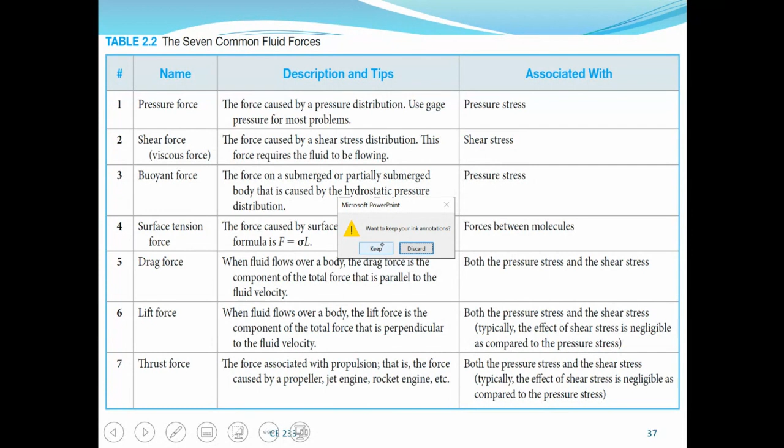Oh, okay. My time is up. In the next class, I will go over these fluid forces, and then we move to viscosity.